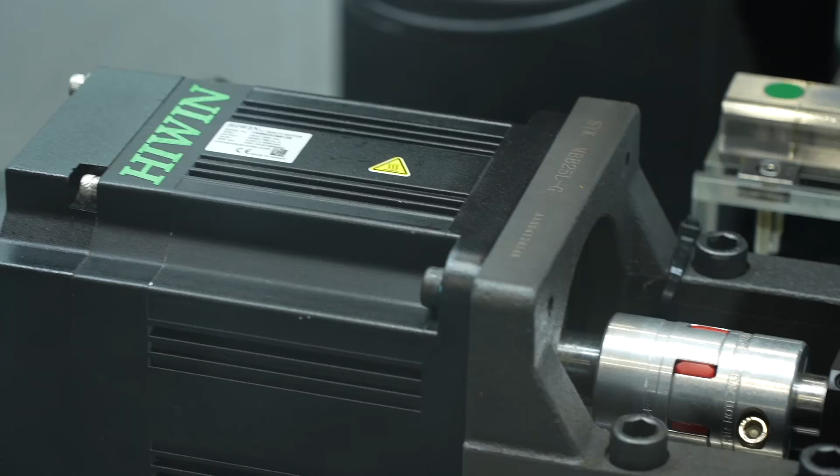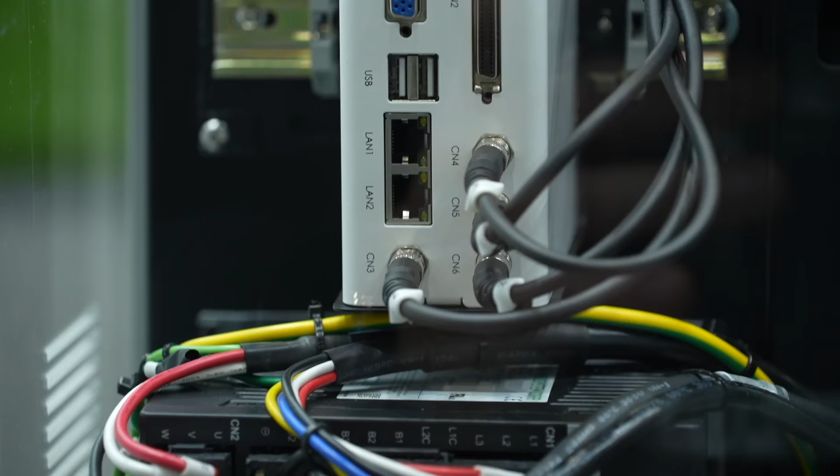Once we can control the product in the thermal-friendly condition, we can keep producing the good quality product. In case the temperature increases in an abnormal condition, we can go and check and stop the production to avoid the product making a not good quality product. The fourth function is about the smart lubrication. Through our edge computing, we can send the big data to our computer and we calculate.

We offer optimum lubrication as necessary. So by this smart manufacturing, we can save up to 80 kilos of CO2 emission in 1 year, which is really a green and good product for customers to achieve ESG and green manufacturing.

Also, the other benefit is through IoT's help, these four functions can send data to the plant manager or the production engineer, so we can control the plant's facility from a remote site. So it's really a good and smart product.

Thank you. Yeah, that sounds very interesting. Now, can you introduce the next product?

The next product I'm going to introduce is the torque motor rotating table. I think HIWIN is the only one in Taiwan, and one of only two in Asia, capable of producing a good quality torque motor rotating table.

With this direct drive technology, there will be no backlash and also very high acceleration. With this product, we can produce precision molds and also for the automotive industry, like auto parts components, they need very high precision. For example, the electrical vehicle battery tray - it not only protects the battery, but is also part of the precision chassis to offer optimum performance of the car.

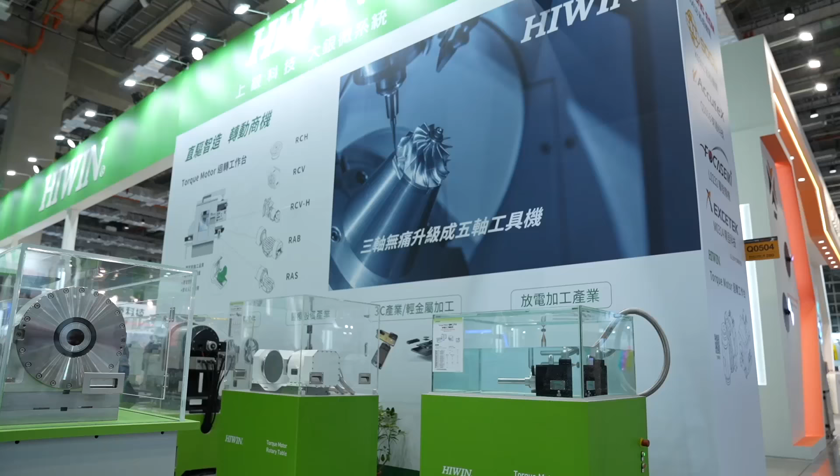Number three, it can be used in medical applications as well. Medical customers are using our direct drive torque motor rotating table to produce artificial joints for the body. So we are helping patients have a very good quality of life.

The number four application can be used in the 3C and semiconductor application. A lot of mobile phone related components can be produced through our precision torque motor rotating table.

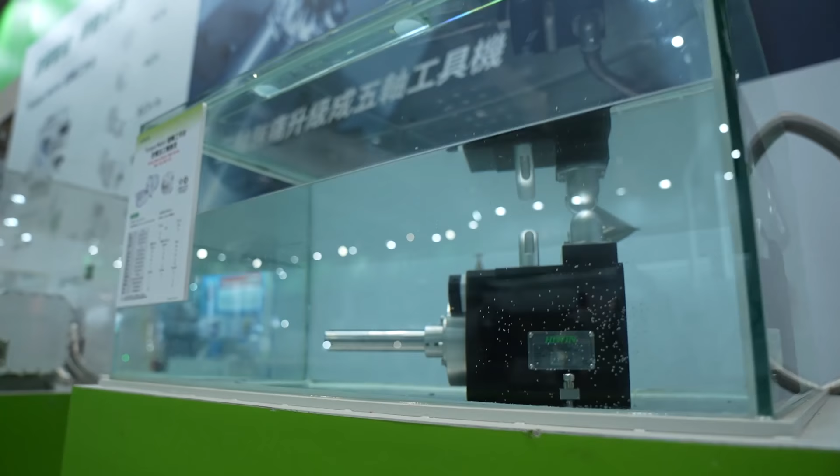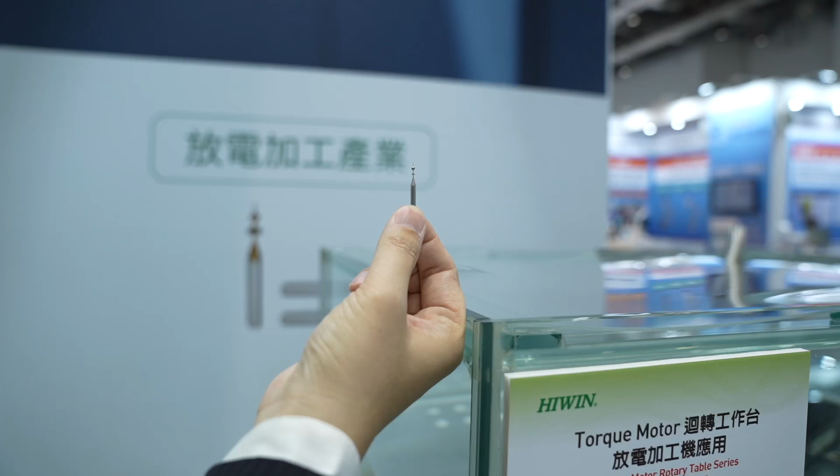The last is for the EDM application. For EDM, we can have IP68 protection level, meaning the table is under water and doing the electrical discharge machining, especially for a very precision stylus head for wafer application and also for medical application. Customers producing the stent for the patient need this stylus to do the production.

Right, so this is the direct drive torque motor rotating table. We're really happy to offer this product to our customers globally.

Yes, so as I understand, you need very high precision for the medical industry, and I think HIWIN does a very good job at that. Yeah, thank you. We really did help a lot of customers and patients globally improve their lives through our good products. So is there any other product you would like to introduce?

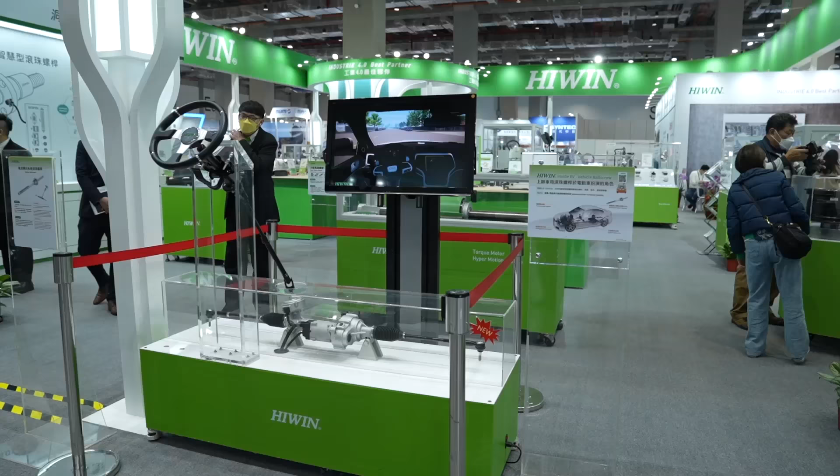The next product I would share with you is our vehicle ball screw. I think it's important because we have 4 different kinds of applications to help the automotive industry and help the driver achieve ADAS, Advanced Driver Assistance System function.

The first is the braking system. The second is the steering system. Number 3 is the transmission gearbox, where we help the customer's car do automatic gearbox transmission.

Number 4, currently under testing, is active suspension. These four important functions are really helping customers today drive a car very comfortably, even with level 2 or higher driving technology. HIWIN's ball screw plays a very important part in the heart of the ADAS system.

Yes, so you mentioned the suspension system is under testing? Yes, we are now working with a global tier 1 supplier, doing the testing now.

And the next product is the robot? Yes, it's my pleasure. I would like to introduce the whole series of HIWIN's robot products. We are the only company in the world with a full series of robots to help the customer. So I'm going to start introducing them one by one.

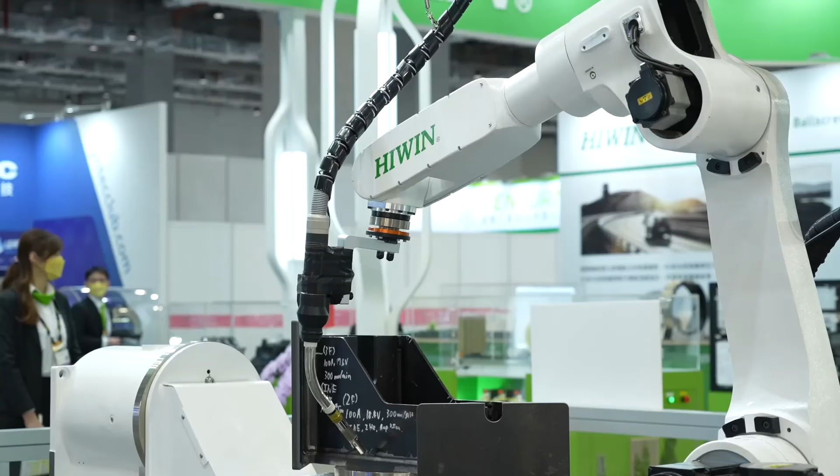Yes, thank you. So there are 4 different types of robots, right? So we have the 6-axis robot - they are the most flexible and complicated, like our human arm.

So you can do welding applications like we have seen today, and also do pick and place automation to help customers achieve smart automation.

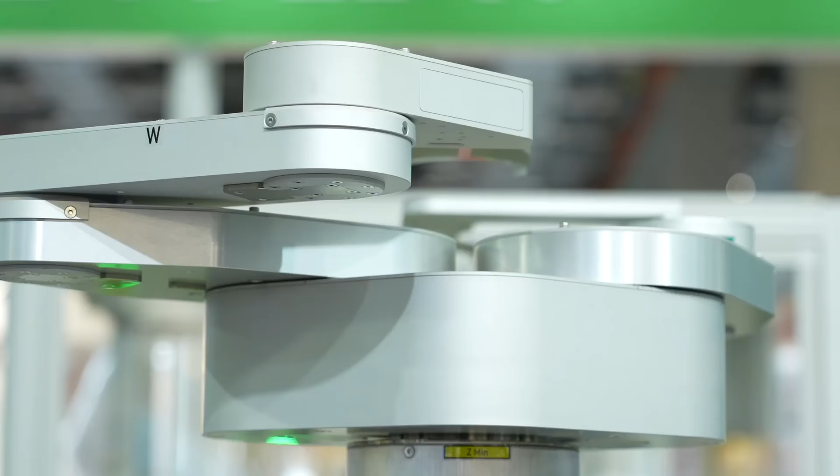And the second robot is the wafer robot. The wafer robot, with direct drive technology, can help customers in the semiconductor, 3C, and PCB industries achieve plant automation and produce good products.

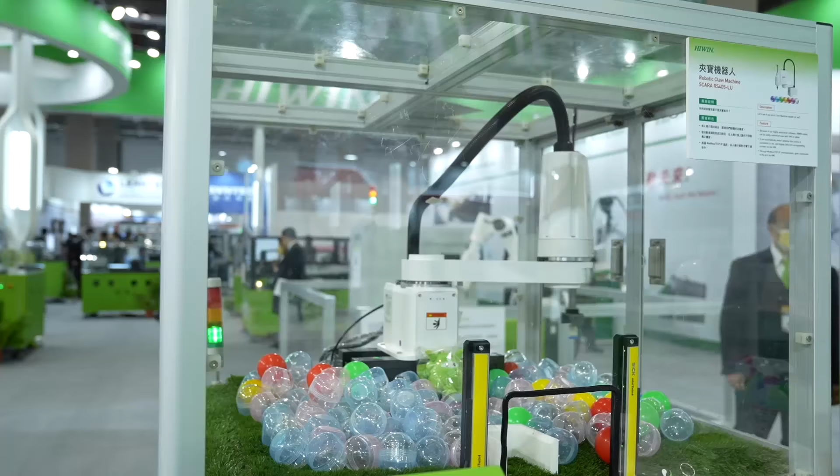The third robot we are introducing on show today is the SCARA robot. SCARA robot can also integrate with a CCD camera, do automation pick and place, and also do quality inspection. And number 4 is a really high-speed robot.

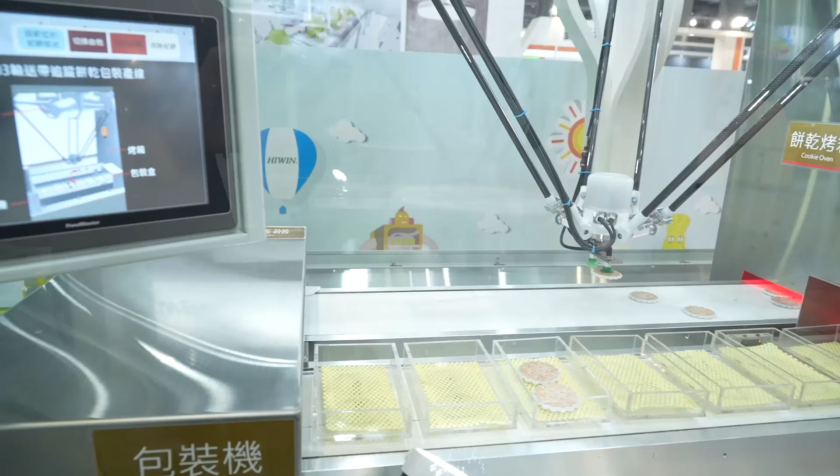We call it the Delta robot. With the Delta robot on show today, you can see the high speed - it can do pick and place, dispensing, and gluing. In 1 minute, it can do more than 100 cycles.

So really it is very high speed productivity, helping the customer to achieve smart manufacturing. It is time saving and also improves productivity. It helps the customer achieve process integration in a very good way.

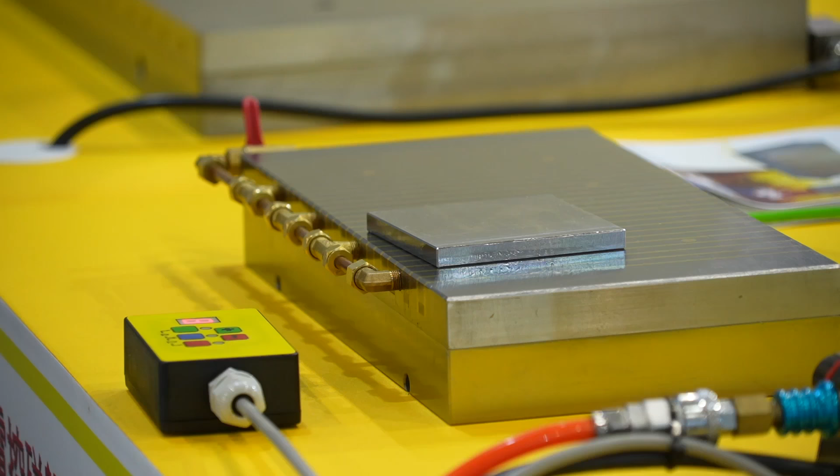Of course. As you can see here is our EEPG series electropermanent magnetic chuck. As you may know, most Earthchain products are focused on machining centers, but now we have a new product for grinding machines. Compared to the traditional mechanical chuck or electromagnetic chuck, the feature of this is that only the on-off needs power supply. So the advantage is no power supply means no heat deformation problem.

For the grinding machine, the accuracy requirement is very precise, right? Yes, only 1 Celsius degree difference and the accuracy may disappear. But for this, only the on-off needs power supply, so it's also very safe. During the grinding process, if any problem causes a power failure, the workpiece will always remain clamped. Yeah, so that's the meaning of permanent.

We also have optional functions, like the air blow system. After clamping on the chuck, maybe you cannot remove it from the chuck surface easily. But with the air blow system, the air comes from the chuck body, then you can remove your workpiece very easily. Yeah, I can see that very easily.

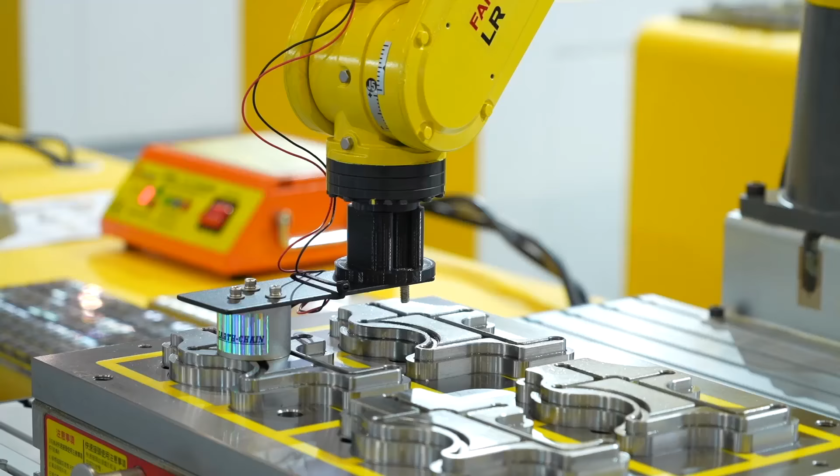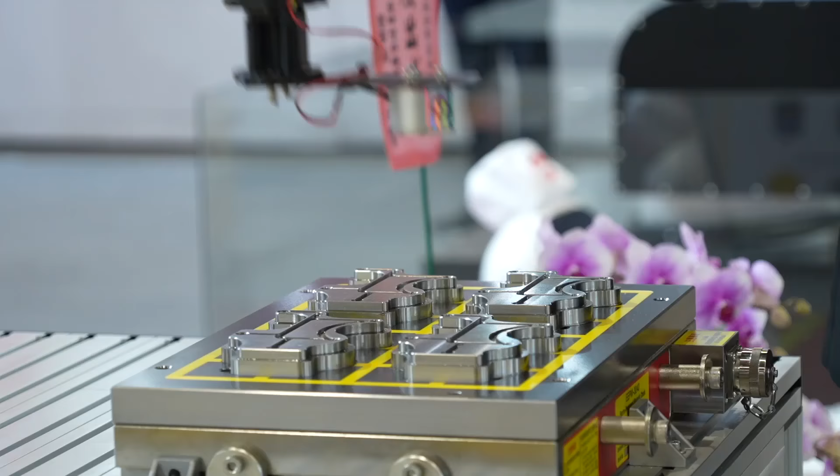What can Earthchain offer for the automatic production field? You can see here our EPSN and PECM series can be well combined with the robot arm. As you can see, one side is a magnetic chuck, and the other side is also a magnetic chuck. The controller box can combine with the machine's CNC and transfer the signal well, so you can carry out automatic production procedures, controlled from the magnetic chuck here. So it means nobody needs to stand here to do the operation. Right, and there are many different size chucks that can be offered.

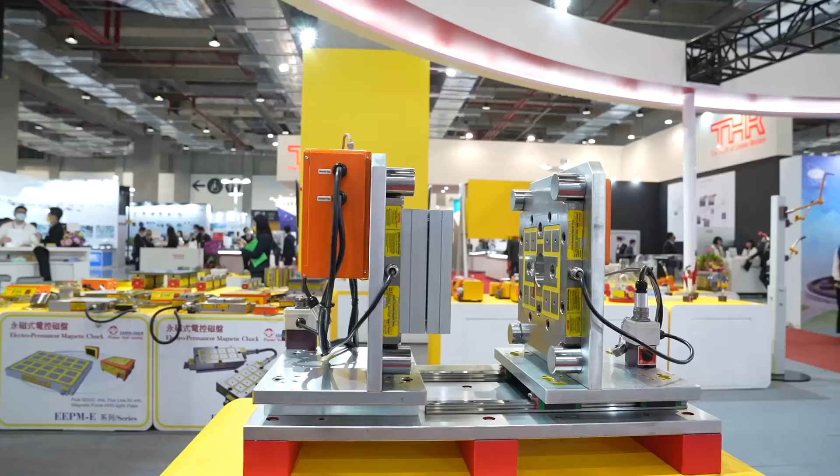All of them can also be easily customized? Yes, sure. So it can fit all the customers' needs? Yes, I believe so. What can Earthchain offer for other industries?

We have a special product for the plastic injection machine. As you can see, this is a demo machine of the injection machine, and the stationary plate and movable plate can be equipped with our EPN chuck. With this chuck, you can easily load and unload your mold from the machine very easily. Without this chuck, the customer would need a whole team to do the mold changing job, and each mold would cost 1 to 2 hours.

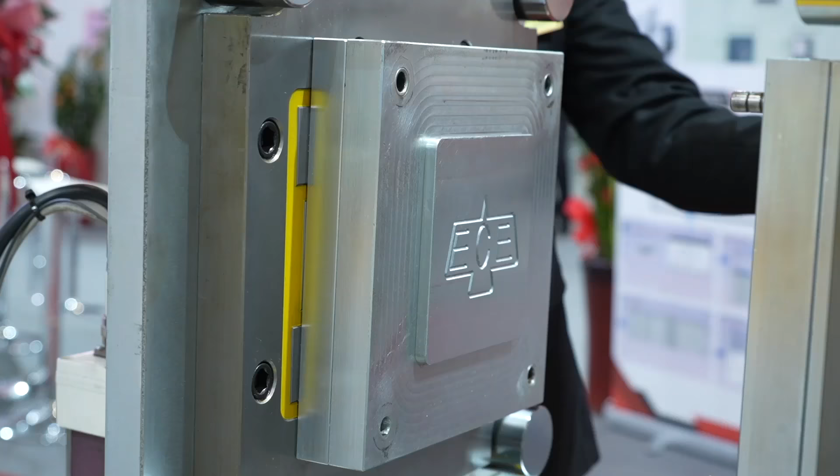For the large size, maybe you'd need a whole day. But with this machine, you can easily do it by pressing several buttons, changing your mold in 10 minutes. It's very efficient for the customer, time efficient, and you also save huge labor cost. And these can be easily customized as well. Yes, sure, that's good.

And this one is a special design chuck for the linear guideway. Okay, the linear guideways. Yes.

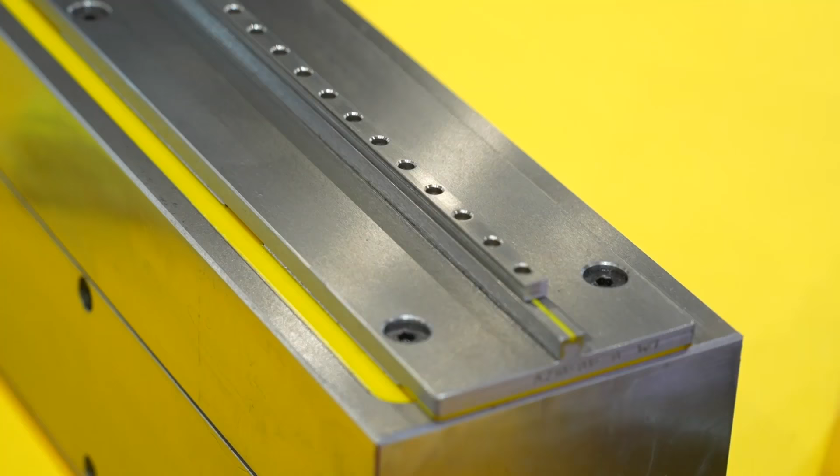So with most of the famous Taiwan linear guide manufacturers such as HIWIN, PMI, ABBA, TBI Motion, they all use our product. So we hope global manufacturers can start to use this special product to increase their efficiency. So all your products can be easily customized to fit the customer's needs.

Yes, we at Earthchain are focused on offering customized products. We have the ability and the know-how, because we've done electromagnetic work for more than 30 years.

It's customized for our European customer in Spain. So it's easier to work with more materials without having to spend so much time. You know, with this size chuck, if you want to replace it, you'll spend a lot of time on it. Right, it will take a long time. Yeah, that's time consuming.

Thank you so much for introducing all your products. As you can see, we have many customized products. We are not only a magnetic chuck supplier, we can actually offer the total solution. So if you have any special requirement, just contact us.

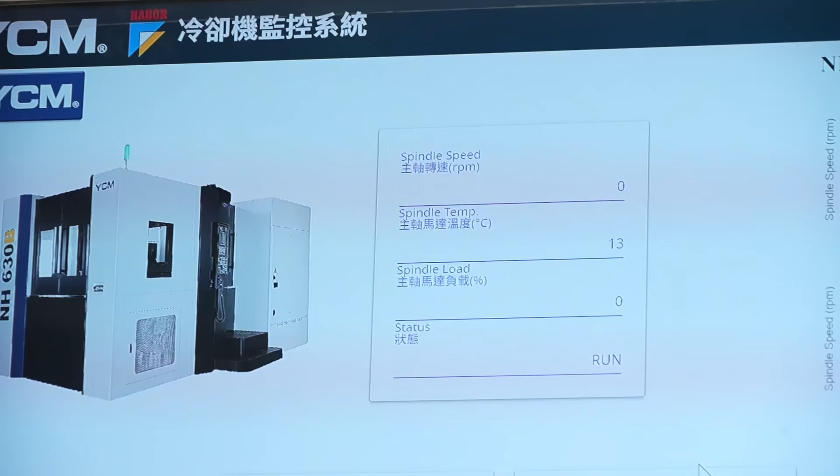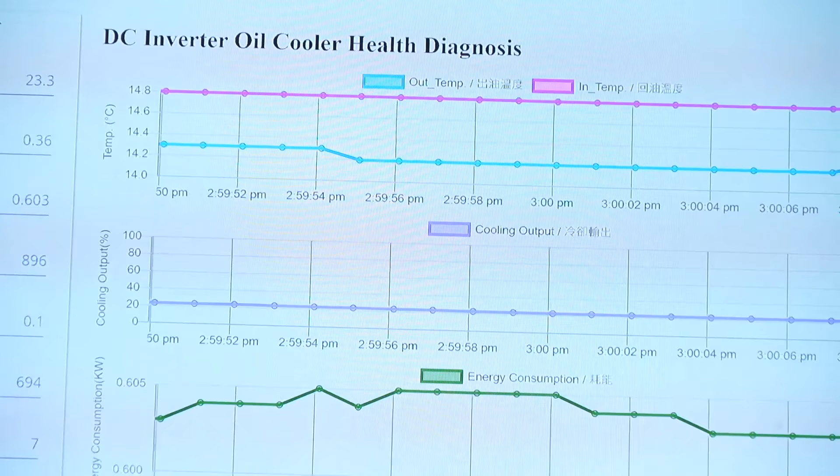In this show, we'd like to show our customers how our cooler unit works for the smart machine. We have a TV showing live temperature status from the Taichung factory, which belongs to YCM. They have a machine working with our inverter cooler unit, so we can see real data about temperature condition, power consumption, current of any parts, and real cooling efficiency from our cooler unit. We have many parameters to show customers, and they can use this data to program any kind of curve or table for their management.

Okay, thank you so much for your time. It's our pleasure. Go back to you, Kip.

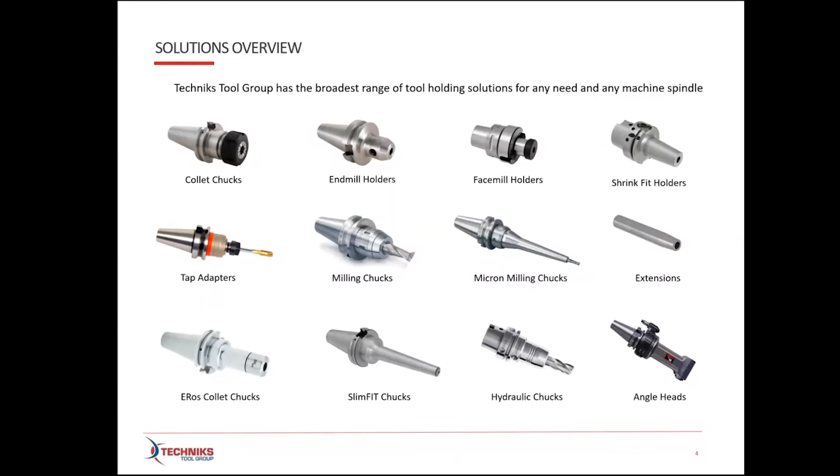Angle heads are going to increase the efficiency of your machine, allowing you to do work in one operation rather than multiple steps or multiple operations.

In addition to spindle tooling, we have many time-saving solutions like magnetic work holding. Magnetic work holding is great because it gives you access to all 5 sides of the part, the top as well as 4 sides, and it allows very fast setups and part changeover. We'll do a lot of applications with mold and die, and very large plates is a very common application, but really anybody trying to save time, not having to mess with clamps, vices, anywhere you've got more of a mechanical setup relative to work holding, where you just want to put the part on the magnet and activate the chuck. And this is not a grinding application, this is for heavy milling. So a great time-saving solution there.

Aggregate heads are fantastic, again adding another axis to your CNC machine. These are mostly used on CNC routers. Probably our most popular application now is actually for composite machining, any time you have to control the depth of your machining process. Think about drilling and countersinking on a large aircraft part, or controlling a sanding depth on an aircraft part. That's what an aggregate head is going to do.

Magnetic deburring is great for small parts. The rule of thumb we use here is parts smaller than your fist, that you could remove the burr with your fingernail, kind of push around the burr with your fingernail. Anything more aggressive than that, this is probably not a great solution. The types of parts we do on here are small, typically non-ferrous parts - think titanium bone screws for the medical industry, small connectors that come off of Swiss machines, light parts where you've got a very intricate cross hole or ID. Because of the magnetic pin media we use, you get the same type of energy on the ID of the part as you do the OD.

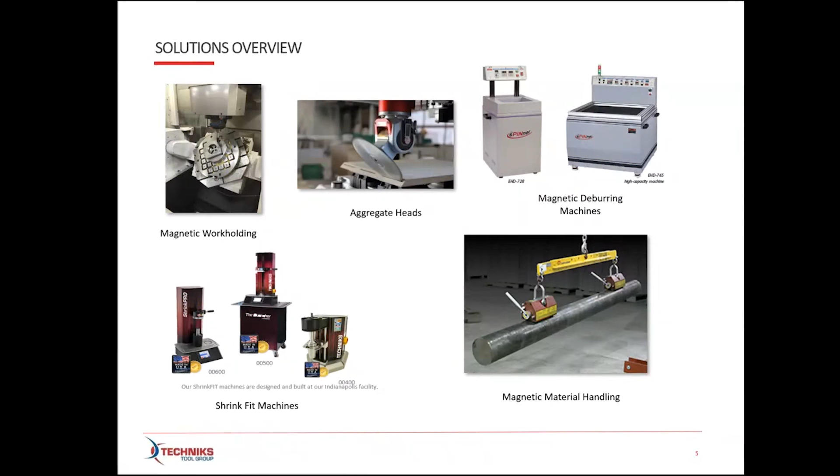Also, we get into material handling, building on our magnetic solutions. We also do both permanent rare earth magnetic work holding as well as some electropermanent solutions for larger parts.

So why do tool holders matter? Again, we focus only on that tool holder or spindle connection between the machine spindle and the cutting tool. It's typically an underestimated or undervalued component of the overall machining process. Folks will go out and buy the most expensive machines and really try to optimize the cutting tool, then put it in an old end mill holder, or rob a tool holder from another side of the machine or another part of the shop. But really, you're only as good as your weakest link - that's what this slide is talking about - really optimizing the tool holder, not only using a high quality tool holder, but the right tool holder for that job. As you do that, and you're able to minimize not only TIR but also the rigidity in the cut, you're going to extend the life of the perishable cutting tool, as well as prolong the life of the spindle and the spindle bearings.

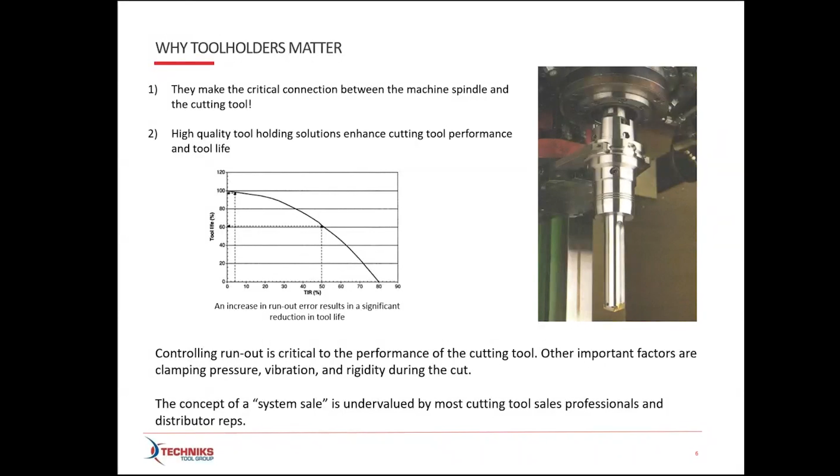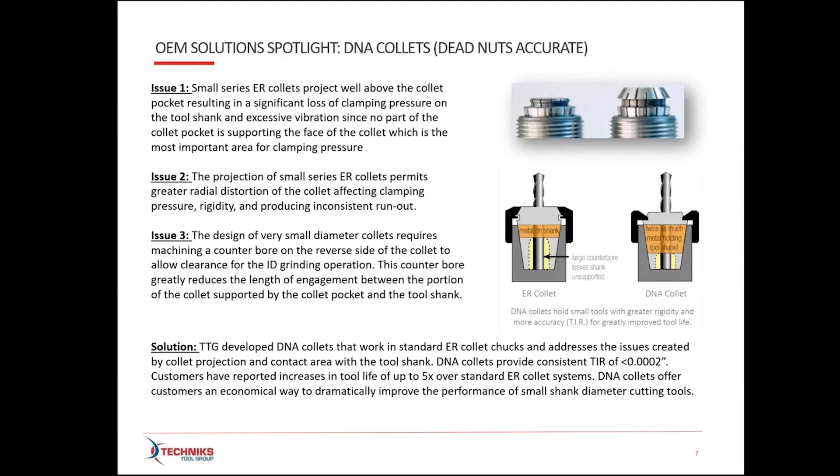We have many solutions that are unique to Techniks and Parlec. In this case, this is one of our systems that we created for small diameter tools—anything under a 1/4 inch or 6 millimeter. Shrink fit can be problematic at small diameters. Your tolerances between the bore and the shank become very tight, requiring a lot more heat to extract the tool from the tool holder.

This was actually a collaboration we did with Mitsubishi Carbide, where they came to us and said, on our small diameter coolant-through drills, we really don't want to use shrink fit. We need a very, very accurate collet system.

You can see on the left an ER16 collet and how much of it protrudes out of the collet pocket. So we worked with our supplier in Taiwan, and on the right you see a collet that looks more like a TG style collet. You're not trusting the top 30-degree angle, you're more reliant on that shelf, and you have a smaller counter bore, so more of the collet makes contact with the tool shank.

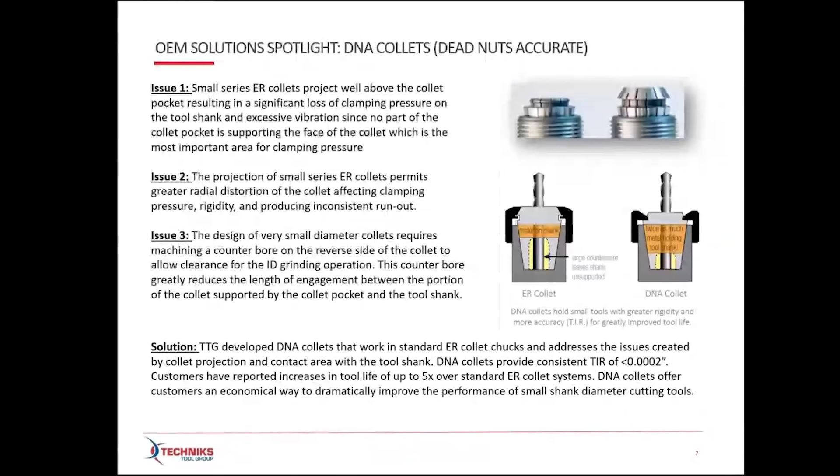All of that technology adds up to a way more accurate collet and more consistent accuracy. It's not uncommon in an ER setup at small diameters to get 2 or 3 tenths in one setup, and then the next time get maybe 8 tenths or even 1 thousandth. So you can end up chasing your tail relative to tolerances.

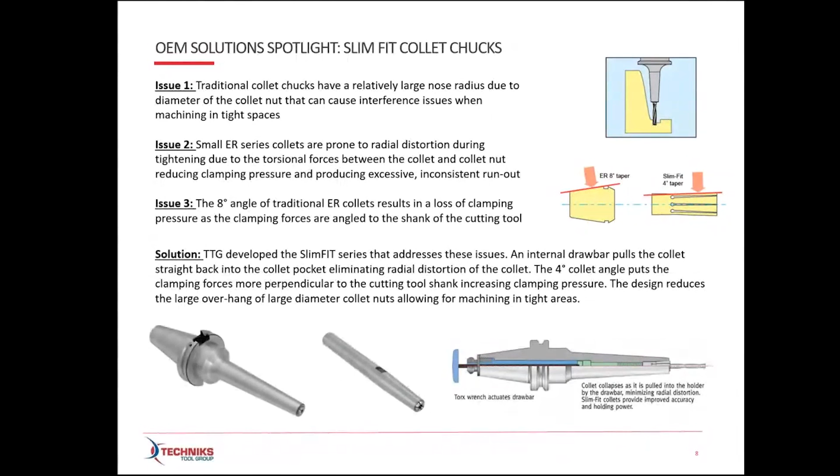I talked a little about our slim fit collet system. This draws the collet in from behind on a 4-degree angle, so there's no nut, which allows a very small nose clearance, a very accurate collet, and lets you get down—like the picture on the top right shows—inside of a cavity without a lot of obstruction from the tool holder. A really good solution for tight clearances.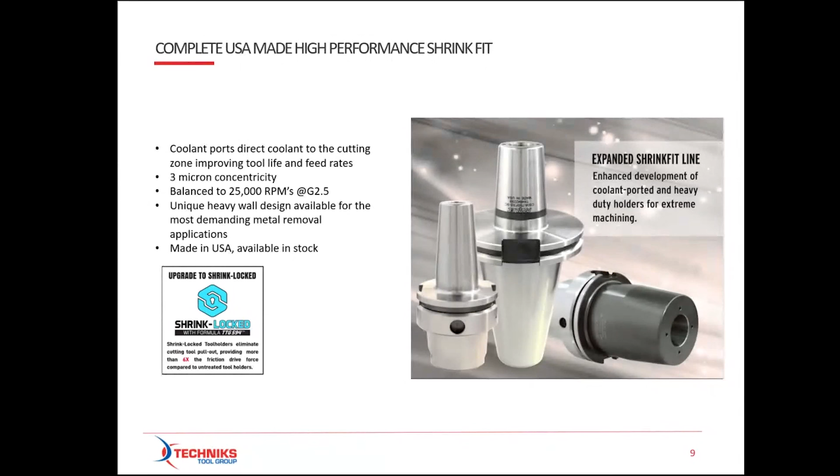They machine a lot of titanium, and they said we can't have a thin wall with our shrink fit—we need a really robust solution so we don't blow the side out of that tool holder. That would be an example of one of the specials we'd make for them.

And then hydraulic tool holders. These are great because you just use a T-handled wrench to do tool changes—no machine or shrink fit machine required. You don't even have to take the tool back to the tool crib and put it in a fixture. These are great in production environments, and automotive guys love hydraulic tool holders.

The bladder fills with hydraulic fluid that provides a very uniform collapse on the shank of the tools, so they're extraordinarily accurate, and historically not great for heavier milling applications. But with our new Triton chuck, on the left-hand side, that has a beefed up design, heavier wall, and more engagement with the shank, allowing you to do some heavier machining.

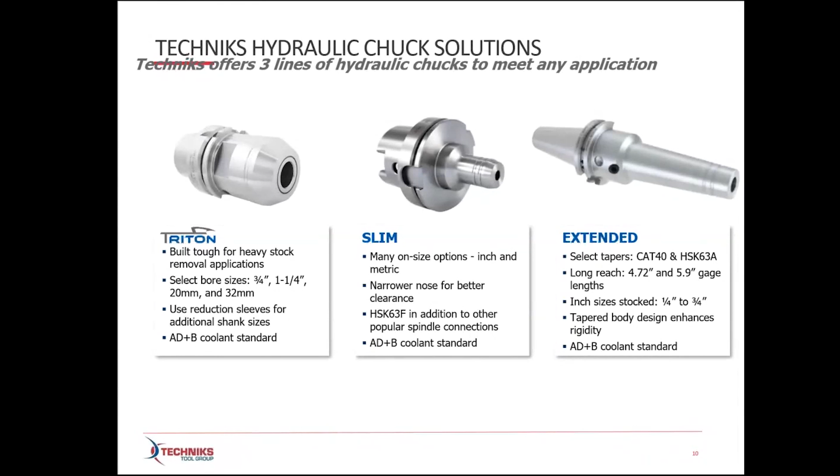These would be our sleeves used in conjunction with our hydraulic holders. Anytime you use a sleeve, you're stacking tolerances and your holding power isn't quite as great. But we've developed a compound that we embed in the ID of not only hydraulic sleeves, but also shrink fit holders, which creates a little more bite in the bore without affecting concentricity, to prevent tool slippage or tools pulling out of the tool holder.

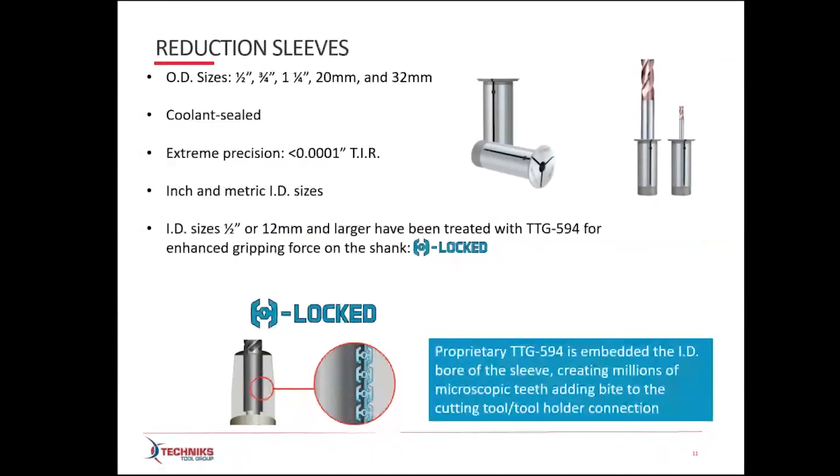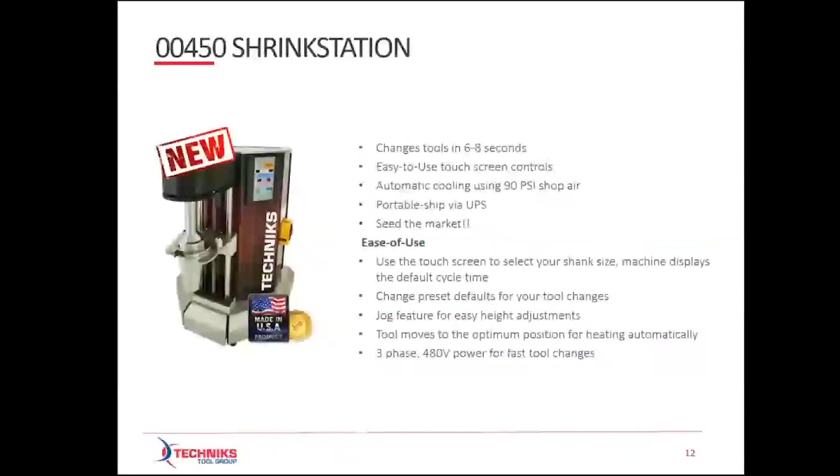We talked a little about our shrink fit machine—this is our shrink station, our entry level machine. Moving along, these are the three machines we have, all the way up to our quencher, which immerses the tool holder into a mixture of coolant and water to quench the tool. The entire process of shrinking and cooling takes about 35 seconds. These are all built here in the United States—local service, local support, local knowledge on how these things are designed and built.

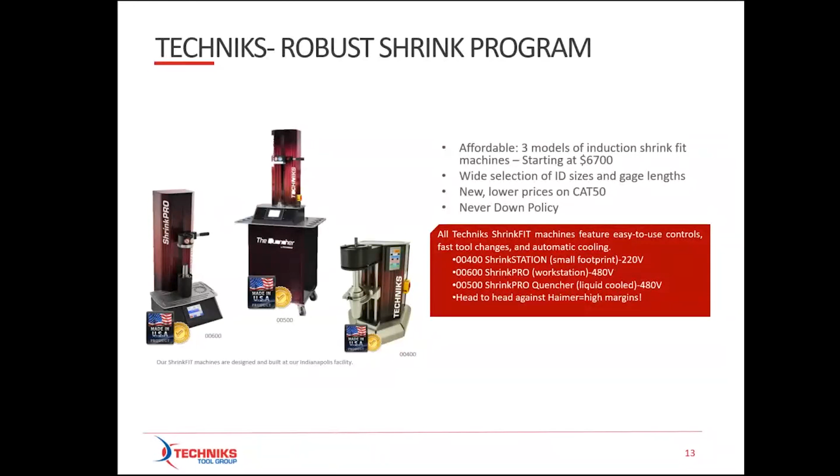A lot of times, customers—especially in production environments or with extreme applications—an off-the-shelf solution isn't going to get the job done. So we have our Turbo Turn division, and with our North American manufacturing capability, if a customer needs a longer tool holder, maybe a really long gauge length, or an HSK 100 or 125, we can do specials and do them very quickly—in as little as 5 or 6 weeks. So if you don't see a standard offering that fits, please keep us in mind for any unique solution.

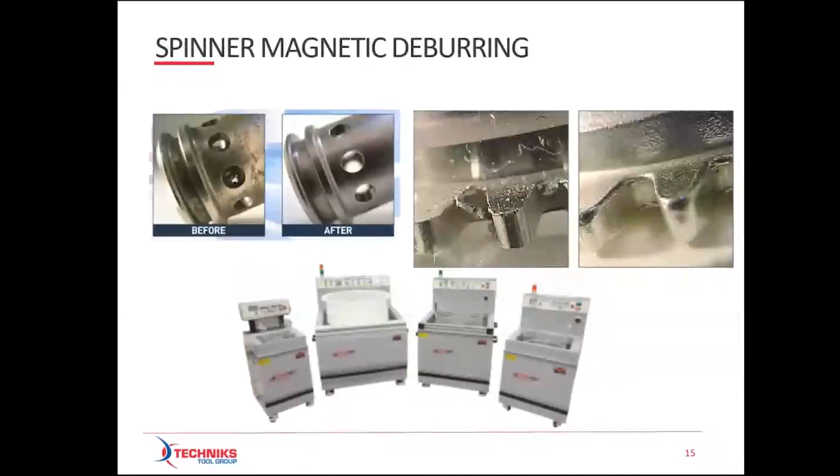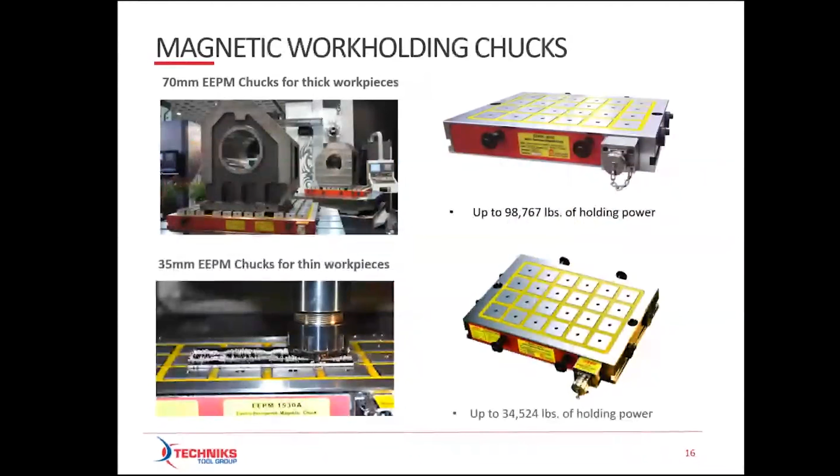One of the capabilities we bring to the table—since we're not able to be present at the IMTS show, and trade shows over the last couple of years have been pretty scarcely attended—is we've got 3 demo vans, one in each region of the country, that we can take to the customer. We have our spinner deburring machine, our shrink fit machines, magnetic work holding, and of course all of our tool holders represented in the vans. We can roll right up into a shop. It's a very powerful sales tool that lets customers get hands-on with our technology and see the benefits firsthand.

I know I went fast today and covered a lot of material, but hopefully gave you a nice overview of all of our capabilities, both on the product side as well as some of our support.